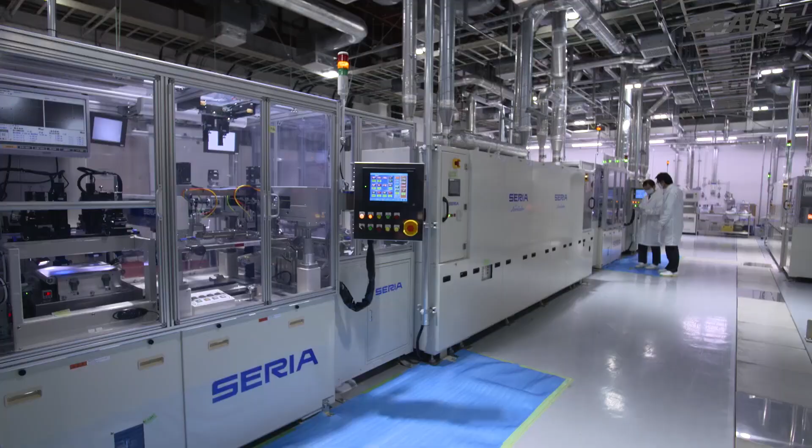Photovoltaics converts solar energy into electricity. The conversion efficiency of typical current solar cells is about 20%. Improving PV efficiency is a key issue.

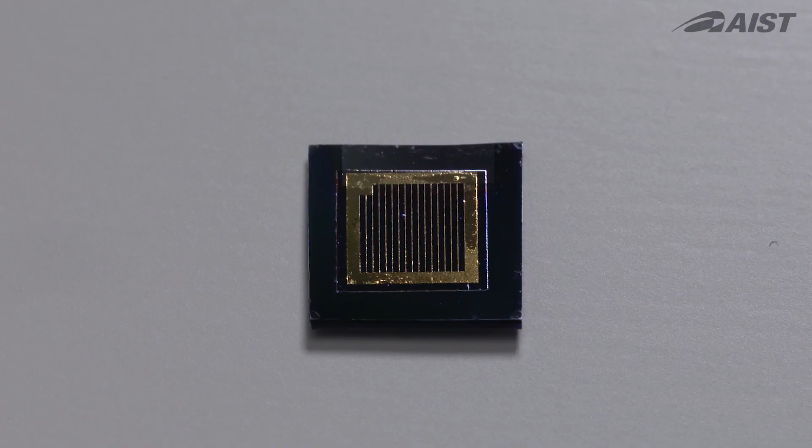FREA has achieved a conversion efficiency of 27.7% with multi-junction solar cells consisting of gallium arsenide-based and crystalline silicon-based solar cells. Since multi-junction solar cells can use wide solar spectra more efficiently than crystalline silicon solar cells, they can achieve higher efficiencies.

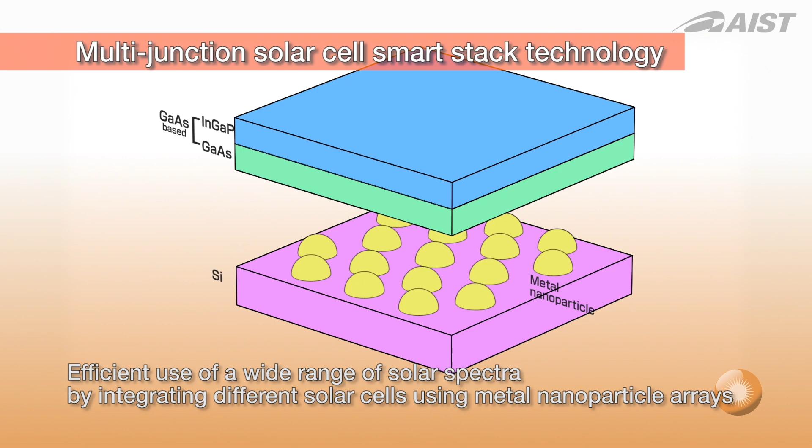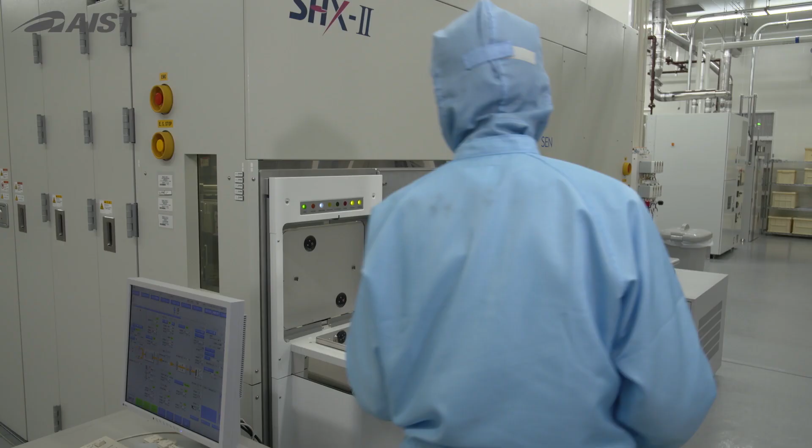This multi-junction solar cell was made possible by using SmartStack, a bonding technology integrating different types of cells using metal nanoparticle arrays. By applying an ion implantation technique with a newly developed stencil mask, FREA has successfully formed a diffusion layer with a more uniform junction depth. This technology allows the fabrication of high-efficiency solar cells with far fewer steps.

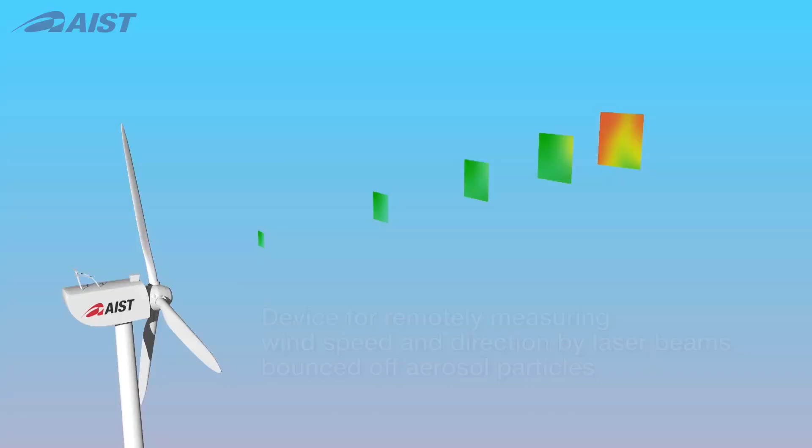At FREA, research is underway on remote sensing measurement technology for wind forecasting. LiDAR is the key. LiDAR is a remote sensing device for measuring wind speed and direction using laser beams. Stable winds at sea are now being recognized as an ideal source of wind power. FREA is using LiDAR to conduct R&D in assessing offshore winds.

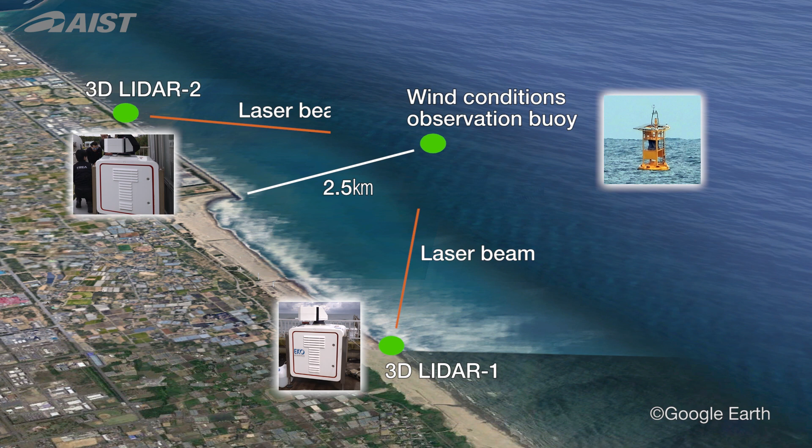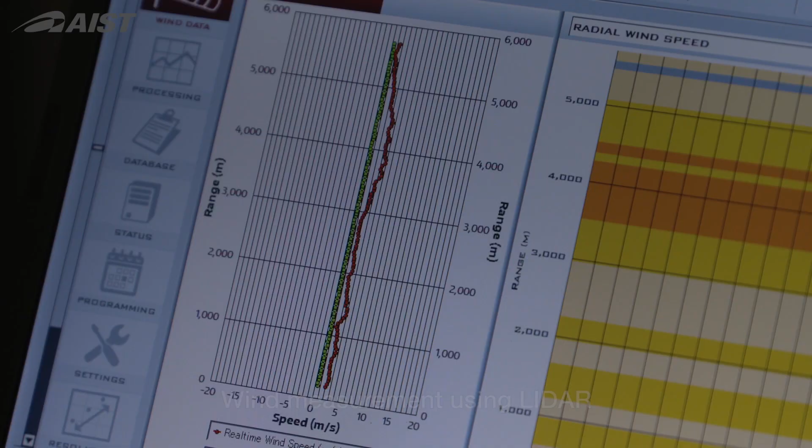The latest development is a remote offshore wind measurement method using 3D LiDAR. In current field experiments, 2 3D LiDARs are set up along the coast, and laser beams are directed at a wind observation buoy 2.5 kilometers offshore. Data collected from the buoy and estimations made from LiDAR data are compared. Using LiDAR data, this research has made it possible to estimate offshore wind speeds to within a 5% margin of error.

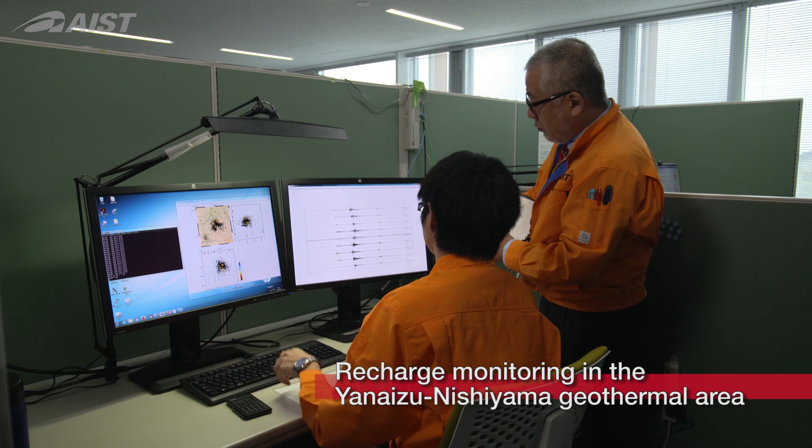Complementing the sun and the wind is another source of renewable energy, geothermal energy. Unlike solar and wind power, geothermal power is firm and is thus being recognized as a potential source of base load power. To optimize the recharging of water into geothermal reservoirs for sustainable steam production, FREA is monitoring the micro-earthquake activity that occurs during these injections at the Yanaizu Nishiyama geothermal field in Okuaizu.

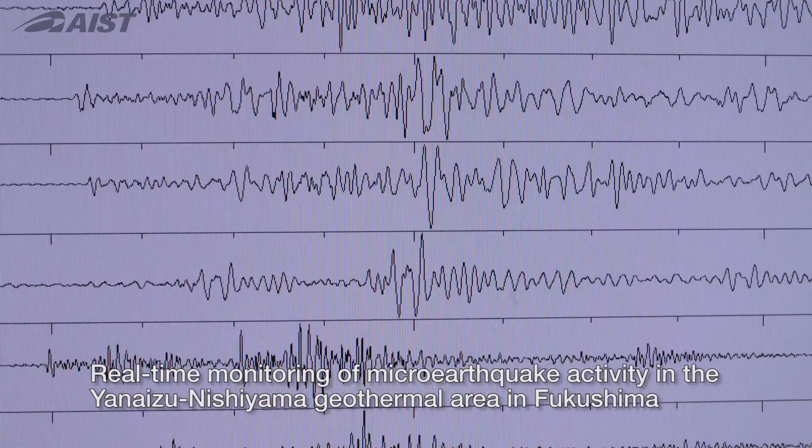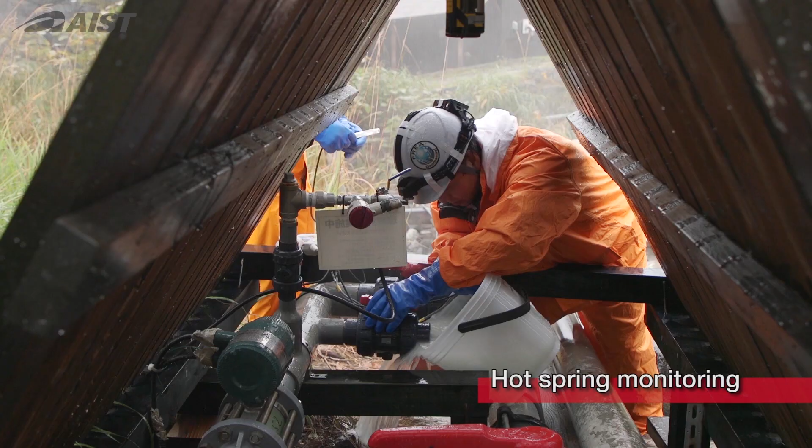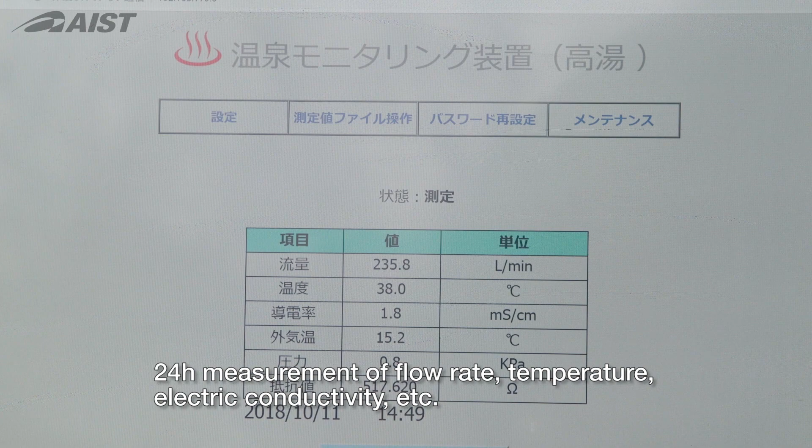The underground fluid flow is visualized. To allow geothermal power generation and hot spring use to coexist, FREA has developed a continual hot spring quality monitoring system. By digitizing data such as hot spring flow rates and temperature, we aim to scientifically explain the relationship between geothermal power and hot springs.

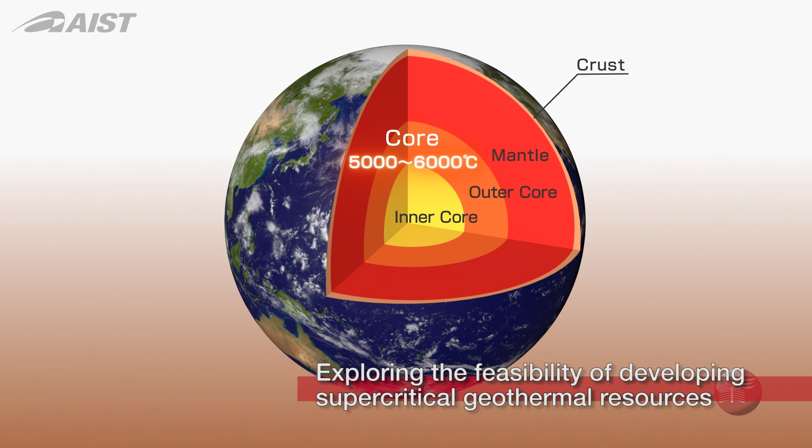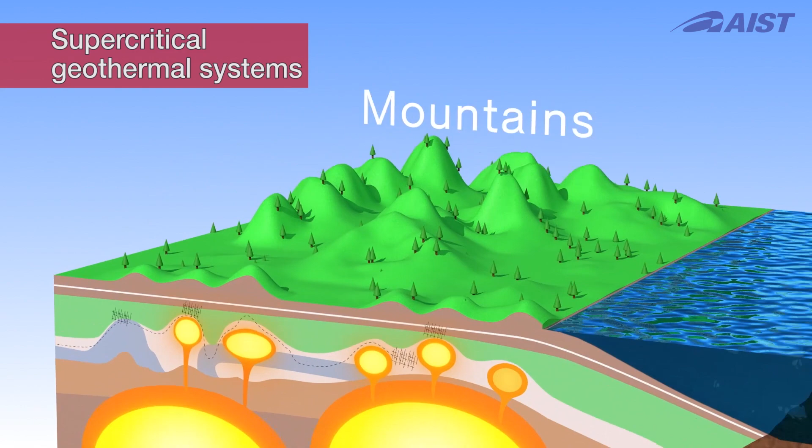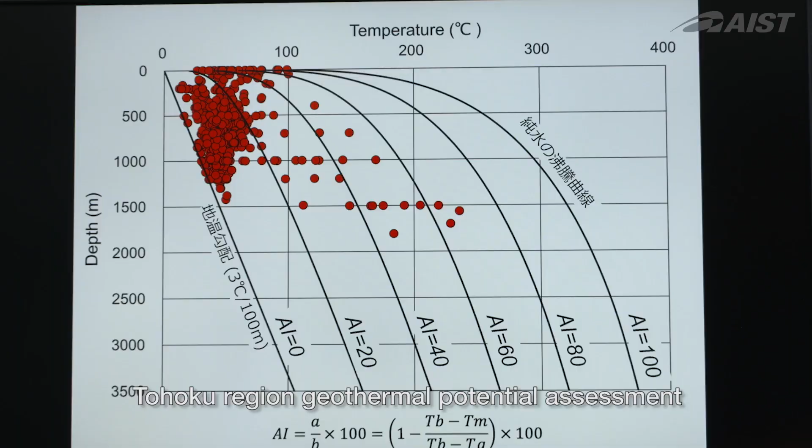Developments in supercritical geothermal resources will pave the way for the use of geothermal energy. Supercritical geothermal power generation uses thermal energy from magma 3 to 5 kilometers underground. FREA has created a supercritical geothermal system model of the Tohoku region. Based on this model, power generation simulations have shown that, in some cases, over 100 megawatts of power can be generated at one supercritical rock mass.

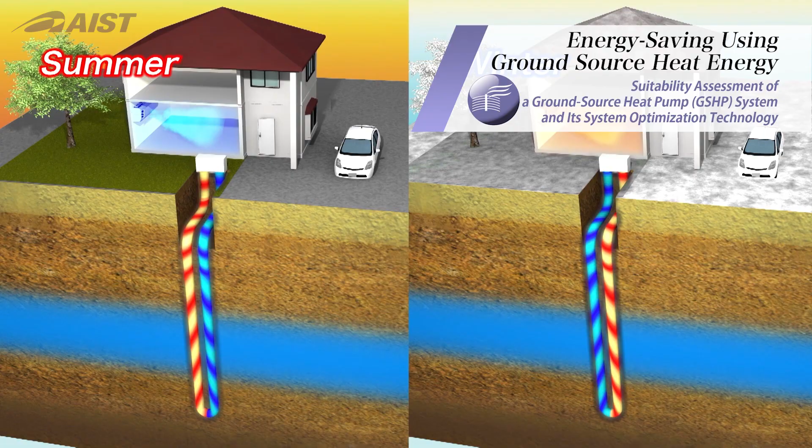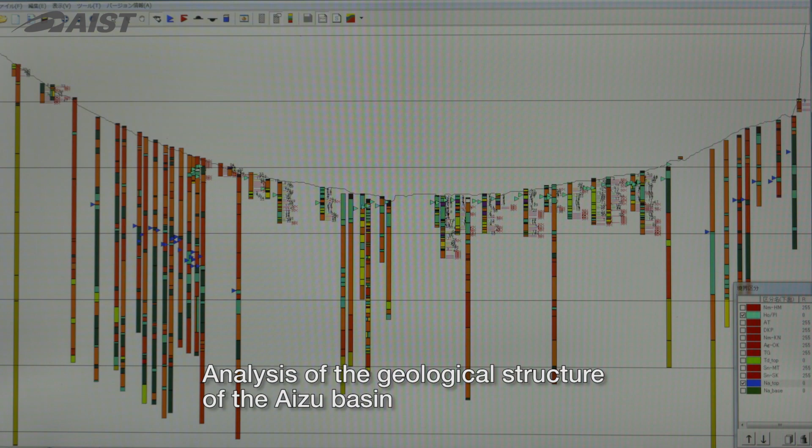FREA research is underway on ground source heat pump systems, an energy-saving technology that uses subsurface heat, which stays constant all year long. FREA has conducted geological and hydrological surveys at various locations in the Tohoku region, and based on data collected, established a potential assessment method for GSHP systems.

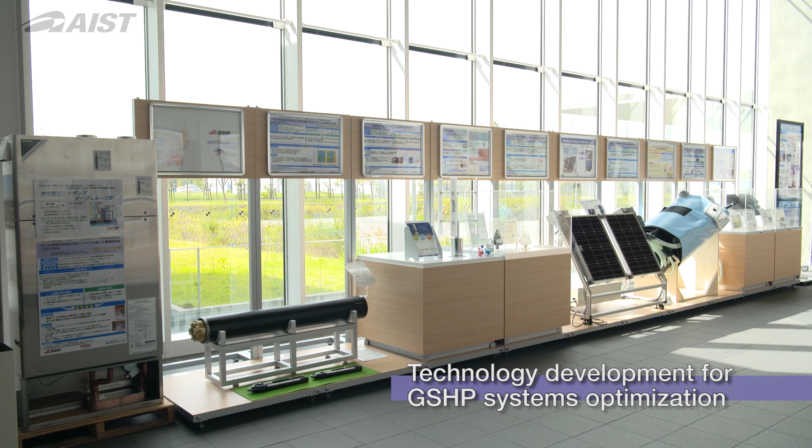Using hydrogeological data, we constructed a regional-scale groundwater flow and heat transport model to simulate ground source heat pump operations. We are compiling GSHP suitability maps. In addition, FREA is evaluating GSHP systems and operation methods appropriate for regional hydrogeological characteristics. For example, we evaluated this tank-type ground heat exchanger.

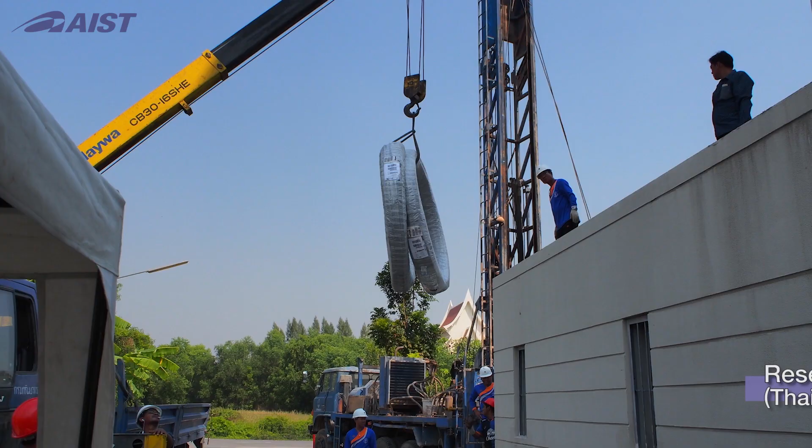FREA is also introducing GSHP systems in Southeast Asia, conducting demonstration tests in cooperation with governmental and academic institutions in Thailand, Vietnam, and Indonesia.

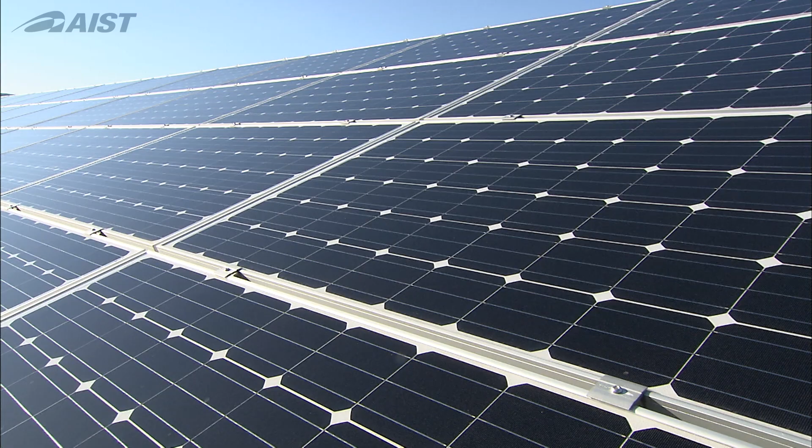We've succeeded in converting 15% of the solar energy collected in one day into hydrogen. The hydrogen generated is supplied to Japan's first renewables-powered mobile commercial hydrogen station.

Metal hydrides can be safely used as a hydrogen storage medium. They are alloys that can absorb 1,000 times their volume in hydrogen and desorb the hydrogen when heated.

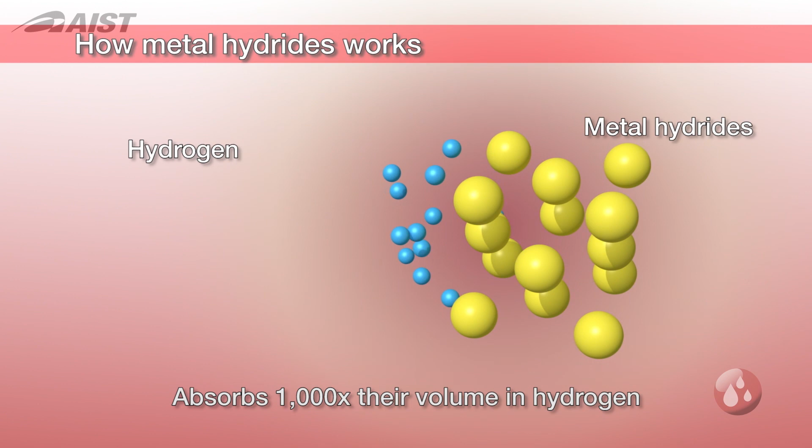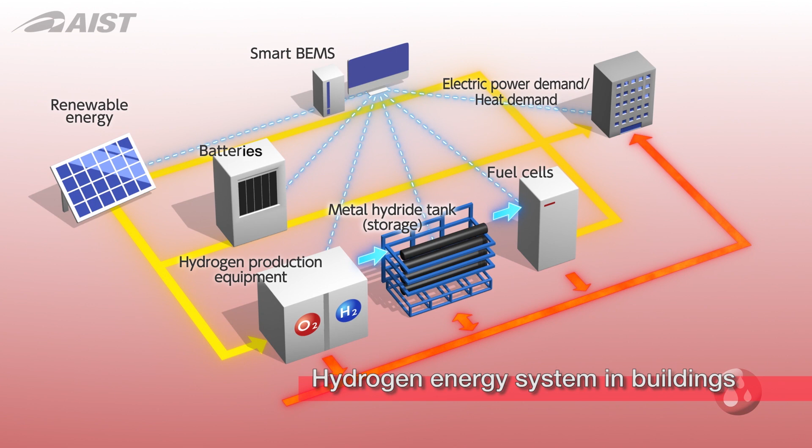We are studying energy systems that integrate these technologies with the goal of using hydrogen to supply electricity and heat to buildings, thereby reducing emissions to zero.

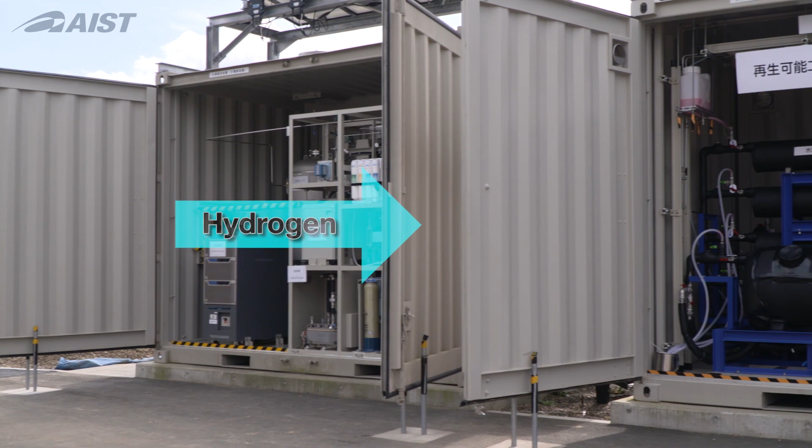Electricity from solar cells can be efficiently used to conduct water electrolysis to produce hydrogen. The hydrogen is then stored in metal hydrides. This hydrogen can be desorbed when needed and converted by fuel cells into electricity. Short-term surplus electricity can be stored in batteries.

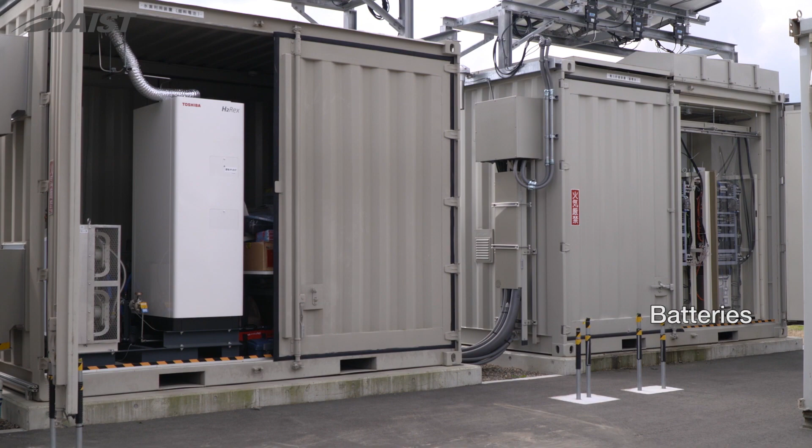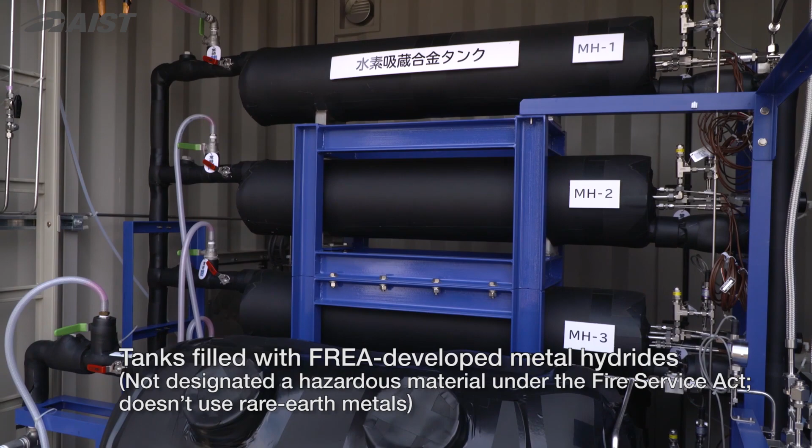The system uses tanks filled with metal hydrides. The metal hydrides are safe, non-hazardous, common metal alloys developed by FREA.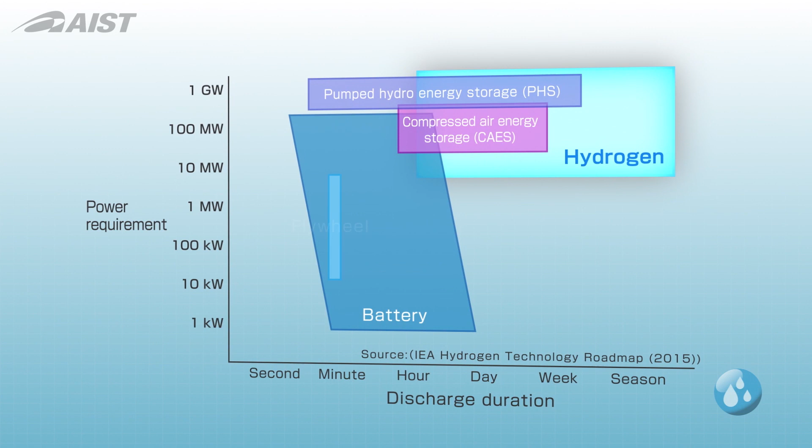FREA is researching hydrogen energy carriers for the storage and transportation of hydrogen made from surplus renewable power. Hydrogen is the ideal medium for the long-term storage of massive amounts of renewable electricity. Hydrogen energy carriers make hydrogen safer to store and use.

Hydrogen energy carriers such as organic chemical hydrides and ammonia reduce hydrogen gas volume to less than 1/500th and 1/1300th, respectively.

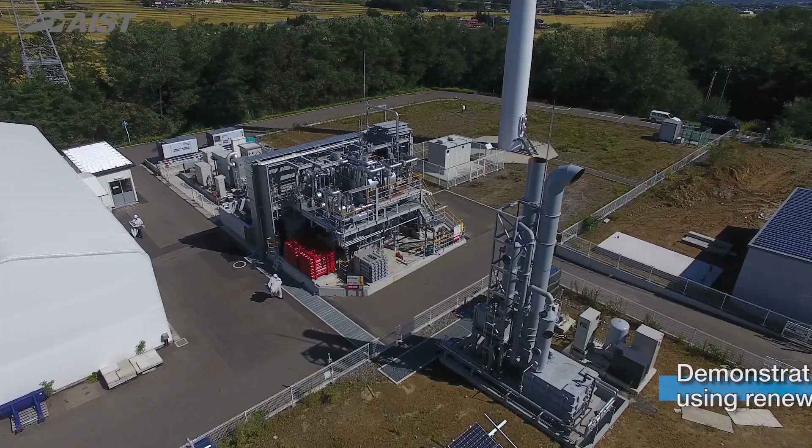FREA is the first in Japan to operate an ammonia synthesis demonstration plant using renewable energy-derived hydrogen.

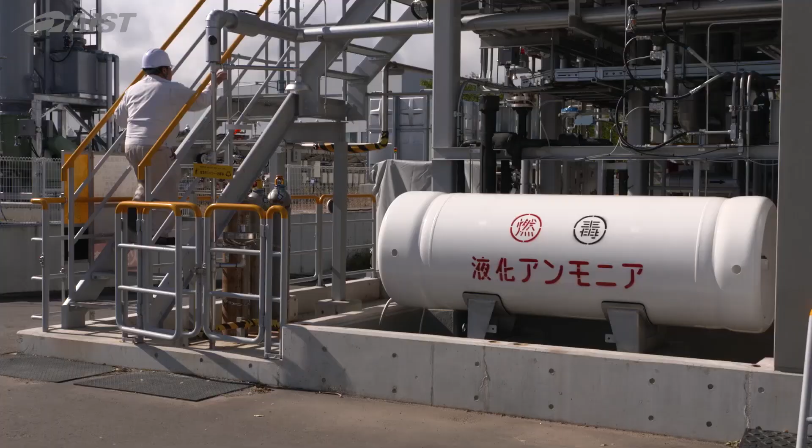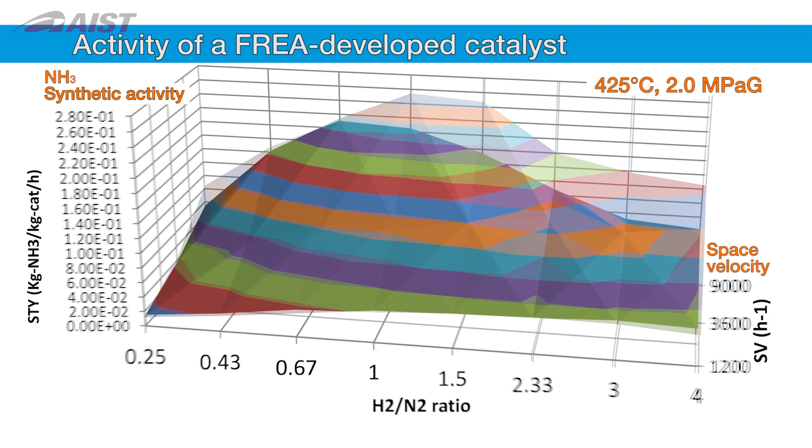FREA has recently developed a catalyst that remains active in a broad range of conditions. Using this catalyst, we developed a new ammonia synthesis process suitable for renewable hydrogen at low temperature and pressure.

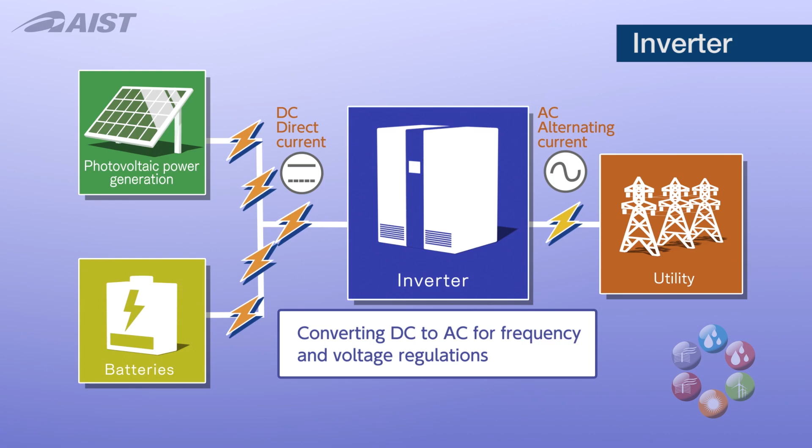Inverters are key to maintaining grid stability with the use of renewable electricity from intermittent sources. Inverters not only convert the direct current electricity generated by photovoltaics and wind into alternating current, they can also stabilize voltage and frequency.

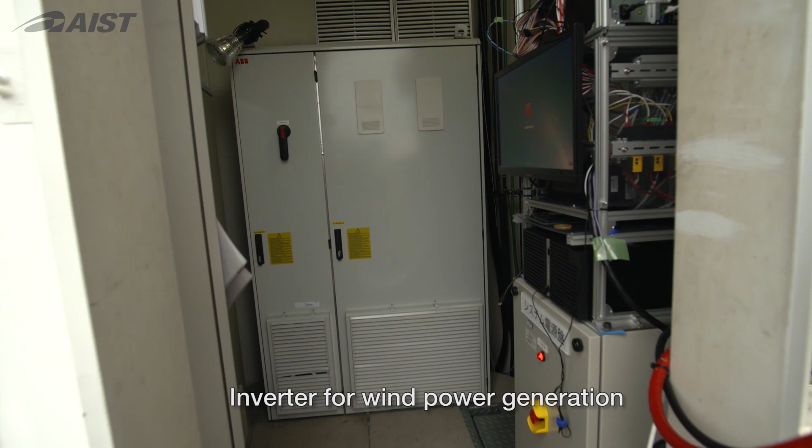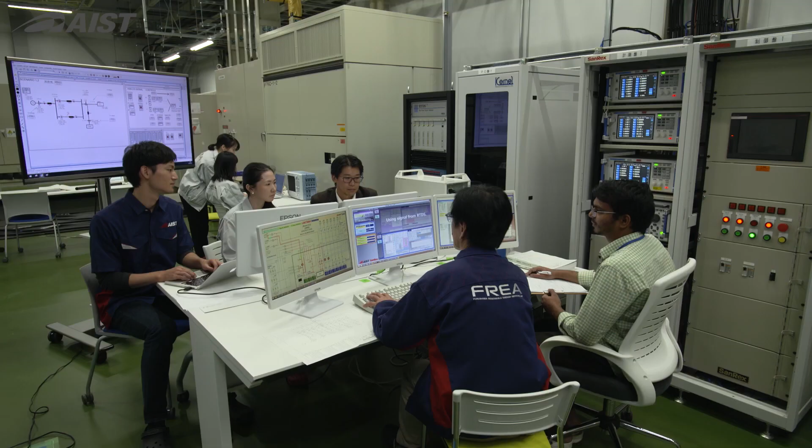FREA is advancing R&D of smart inverters, vital to expanded use of renewably generated electricity in the power grid. Smart inverters not only have the potential to autonomously control power output with intermittent renewables, but also to connect with information networks to proactively support the power grid.

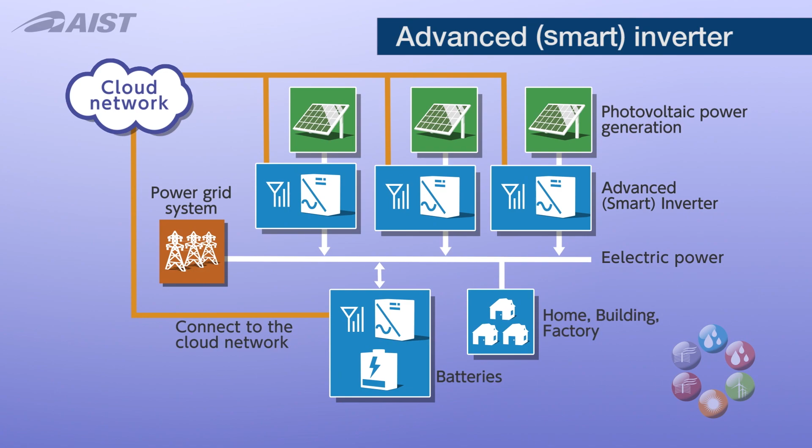FREA implemented automatic testing procedures for such smart inverters, helping to reduce test times by 80%.

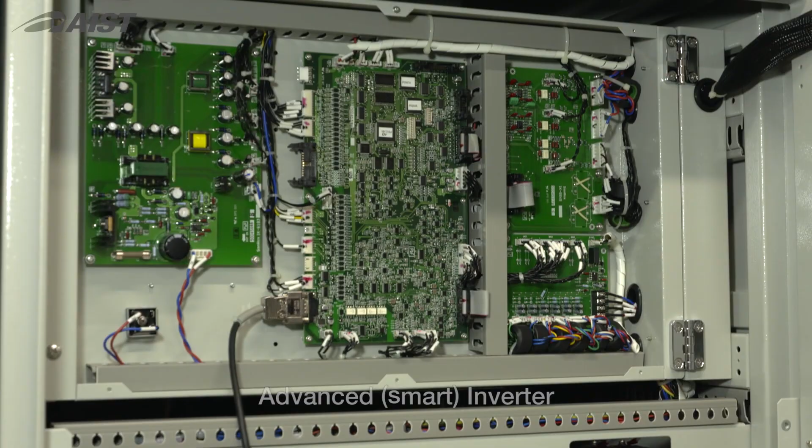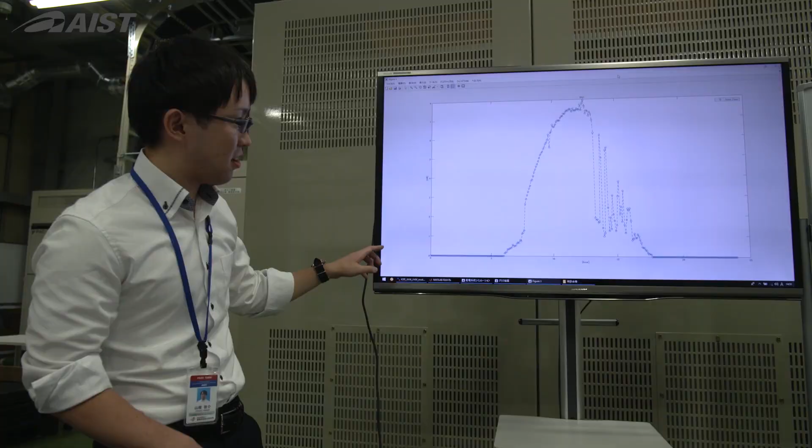Developed by FREA, the SORA grid is a simulation tool that can analyze the effectiveness of smart inverter functions. It is a tool for verifying grid support functions to be implemented in smart inverters and for power flow calculation in a grid with high penetration of distributed energy resources.

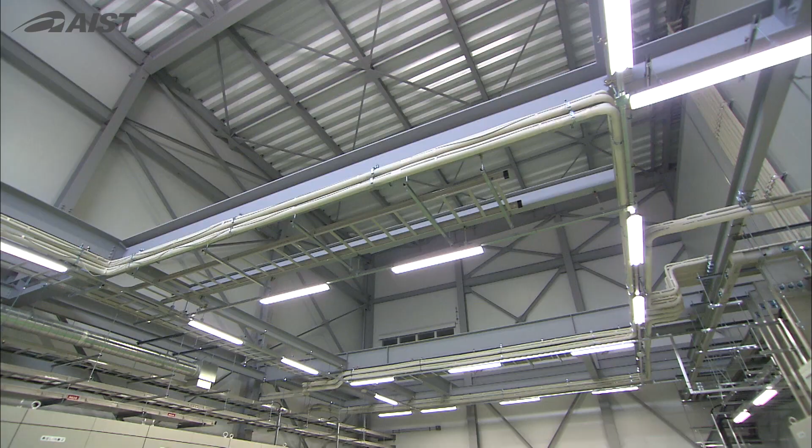At the Grid Connection Testing Facility, we conduct tests on required functions for the grid connection of distributed power, such as solar cells. The Distributed Power Supply Simulator is capable of supplying a maximum of 3 megawatts, 1,000 volts.

Varied output can be simulated according to various conditions. The Grid Simulator is capable of supplying a maximum of 5 megawatts. Voltage and frequency can be configured to any desired value, enabling the simulation of any power grid around the world.

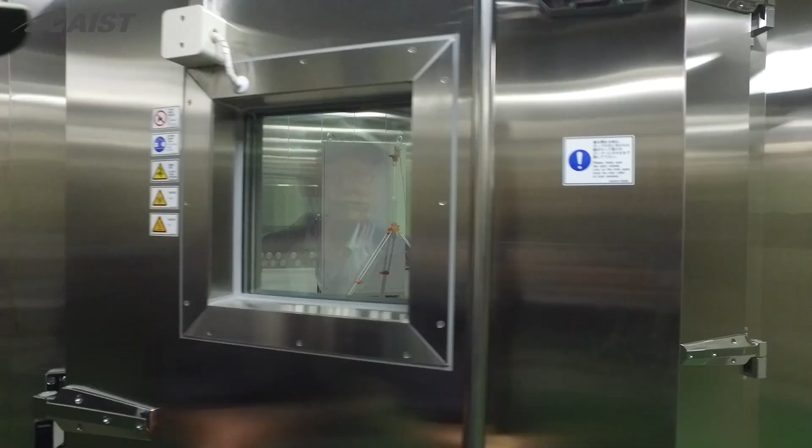At the Safety and Reliability Testing Facility, we simulate actual environments, conducting high-temperature acceleration and heat cycle tests to evaluate long-term reliability, and safety tests, such as surge voltage.

This is an electromagnetic environmental compatibility testing facility.

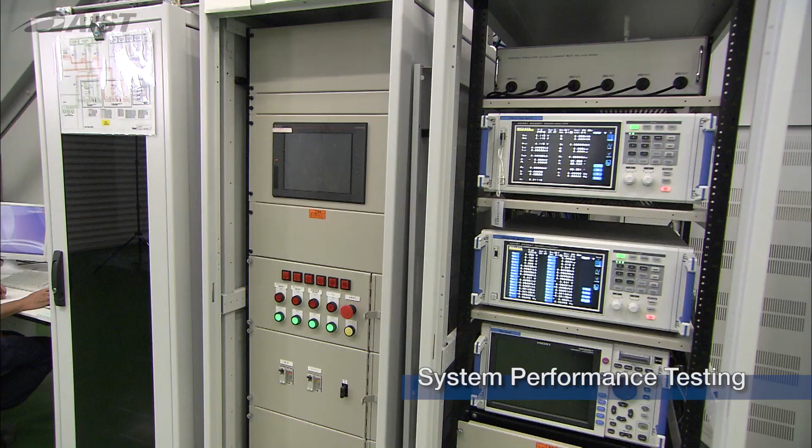At the System Performance Testing Facility, distributed power can be connected with inverters to operate as one system, allowing us to conduct various system performance tests.

One of our key goals is helping with revitalization efforts in Fukushima, Miyagi, and Iwate, the prefectures affected by the Great East Japan earthquake. We support the SEED Support Program, promoting renewable energy technologies invented here.

Over 5 years, the SEED Support Program has worked on over 100 research projects and achieved substantial results. The program has created new industries in the disaster-affected areas. Some projects have been commercialized and received awards.

With the goal of using renewable energy as a major power source for Japan, FREA will deepen cooperative efforts with both domestic and international research institutes and with regional communities, and build on innovative renewable energy technologies from Fukushima. More exciting achievements lie ahead.